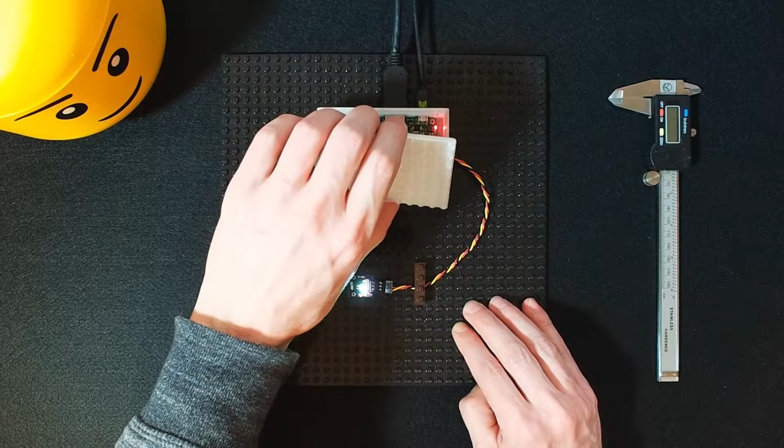Some time ago, I designed this LEGO-compatible case for the Raspberry Pi 3. I used OpenSCAD for modeling and a Prusa MK3S for 3D printing. The case consists of two parts, the body and the removable lid. It is made of PETG material, so it is strong, flexible and easy to print. The case is based on a 12x8 LEGO grid and is 3 bricks high.

I am quite happy with the result, as it fits quite well with the LEGO bricks. The next thing I needed was a housing for other boards, like the 7-color LED flash module. Since I didn't want to design a separate case for each module, I decided to create a dynamic SCAD script that would generate a case for each type of PCB. I combined all my SCAD scripts into a library called MachineBlocks and published it on GitHub. You find the link to the repository in the video description. I will show you now how to use MachineBlocks to create your own LEGO-compatible enclosures for your PCBs.